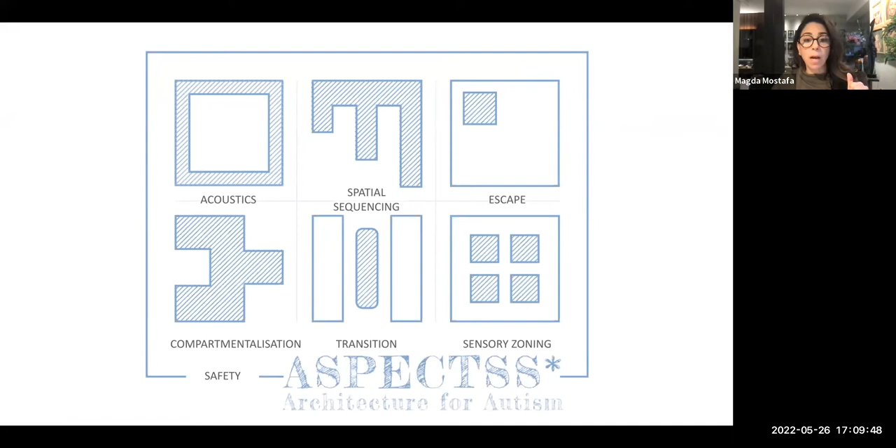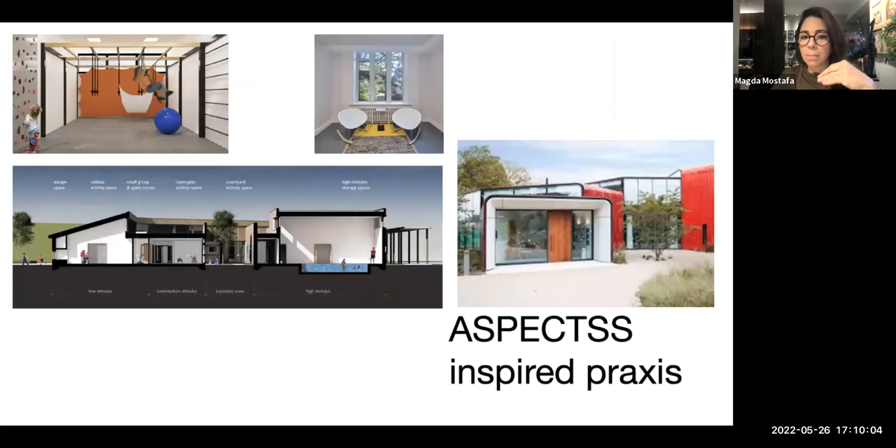Professor Frawley kindly outlined in my introduction the Autism ASPECTSS Design Index and presented its history. It is a framework for how we think about space to take this perspective into consideration. It's now being used in many places all over the world, informing a lot of scholarship, practice, and building design of my own and of partners I've partnered with in many projects all over the world.

This is actually a snapshot from the Dublin City University project, and we've had the kind opportunity to share it and its philosophy in a lot of different educational and professional venues, at the United Nations and other places like the National Autistic Society, and in the United States with different foundations. We've had the opportunity to discuss what it means to think about autism-friendly design from a lot of different perspectives, and we're continually evolving how we approach it.

One of the tools we've created was a recent audit, and we are also looking at how these guidelines—these 7 frameworks and principles—are starting to align with other design guidelines, like, for example, DeafSpace or other research, and looking at just where that fits in the literature.

Just to explain what we mean by the autism ASPECTSS framework very briefly, there are 2 versions of the ASPECTSS framework. The first version, the 1.0, was first published in 2014, and it's comprised of 7 principles. The first of those principles is acoustics.

These frameworking criteria are not prescriptive. They won't say you need to design to a certain acoustical decibel range, or use this kind of acoustical paneling or soundproofing, but they do point attention to the gradient of ways you need to work along the acoustical environment and how that can be in support of autistic users and autistic needs within your spaces.

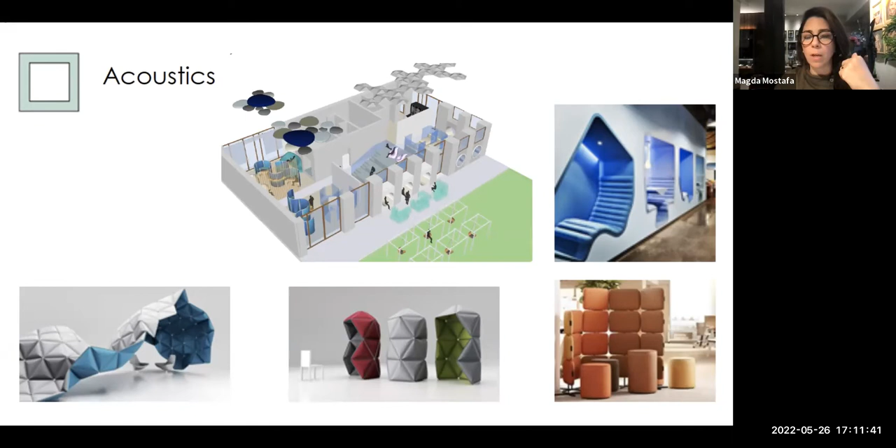And I can talk a little bit more about that maybe in the questions.

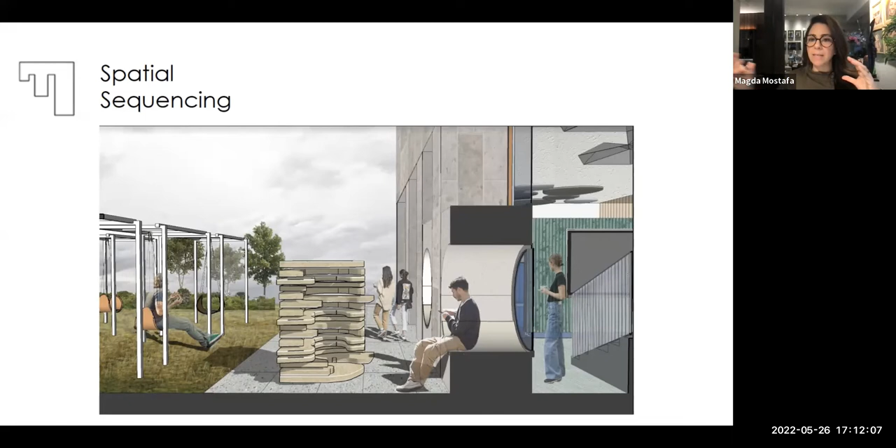The next principle is spatial sequencing, and that builds on the affinity of the autistic mind to routine, order, and predictability. It calls for all of us as designers to look at space as an experience of a sequence of spaces, and design in a way that's more seamless and predictable, to hopefully reduce the stressors and anxieties of being in space that are so common for people on the spectrum.

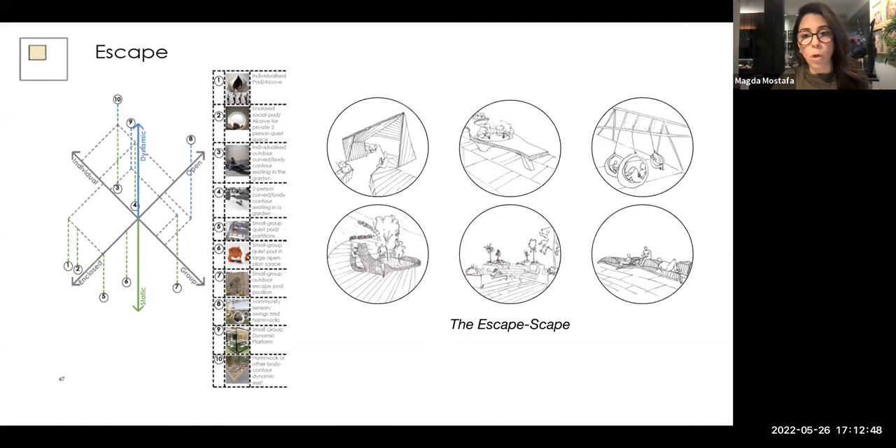The third principle is escape, and it's about creating an infrastructure of places and spaces that autistic individuals, and any individual, can really retreat to in moments of sensory overload. This is really important in places like educational spaces, campuses, cities, and transportation infrastructure. I was just in a lecture earlier today about healthcare environments that I'll talk about in a moment. But escape spaces, the escape-scape or escape network and landscape, can be incredibly powerful in giving access to individuals on the spectrum to space.

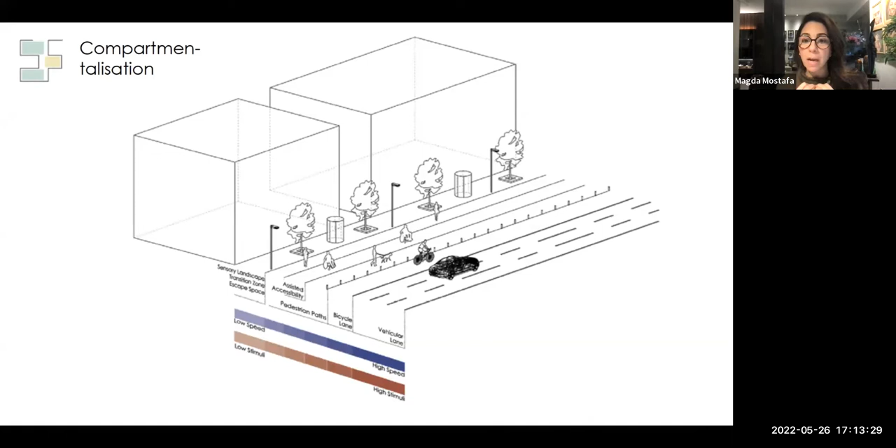The next criteria is compartmentalization, and it's really about organizing our spatial experiences into manageable pieces. One of the biggest challenges, if you think of autism from the sensory perception model, one of the models we can use to define and understand the autistic experience, is that a lot of our challenge in the built environment is unnecessary sensory input. We are constantly expecting people to engage with sensory information that is unnecessary for their task, and that can be overwhelming. I think it almost borders on a level of abuse and disrespect, because we're putting sensory overload into our environments, particularly in critical spaces like school or hospital environments, where functionality is so key to your success. When you put too much unnecessary sensory input into a space, you're disabling the autistic mind that is trying to operate within it.

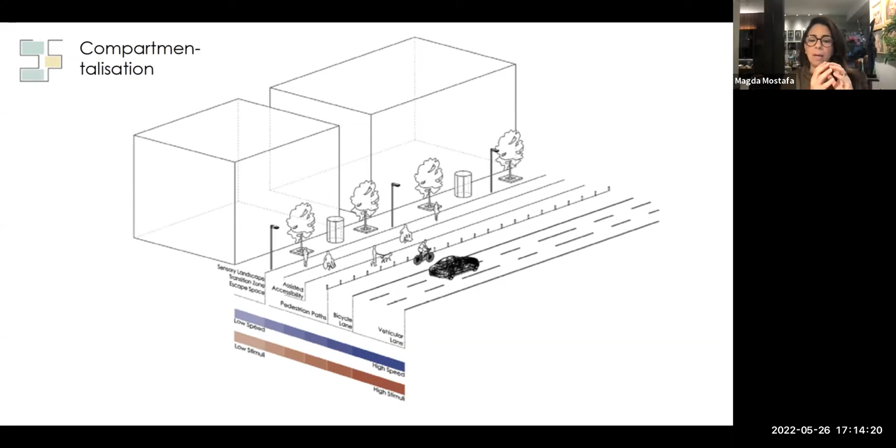So compartmentalization is about only allowing the sensory input that is necessary for the task. It can be applied — I have a diagram here that looks at the city environment — but it can also be applied to classrooms, residential spaces, and it's about cutting space up and reducing the sensory environment to only what is absolutely necessary. And of course, like all of these principles, there are different gradients and different ways to implement it that I can talk about later.

The fifth concept is transition. Transition is key because we expect individuals to seamlessly move from one experience to the next with no opportunity for adjustment, and that can be a huge challenge from the autistic perspective. So creating transition spaces allows, respects, and validates the need to adjust your sensory makeup — to modulate and regulate your sensory experience to prepare yourself for the next task.

Some examples: you're at university, you take the bus on a crowded street, you arrive to campus, and within the first 10 minutes you have to find your class, get in your seat, and immediately focus on a very complex series of information in a social environment you're not particularly comfortable with, in a hall that may be echoey and noisy. You're expected to make that transition immediately, and when you don't, people say you're a slow learner.

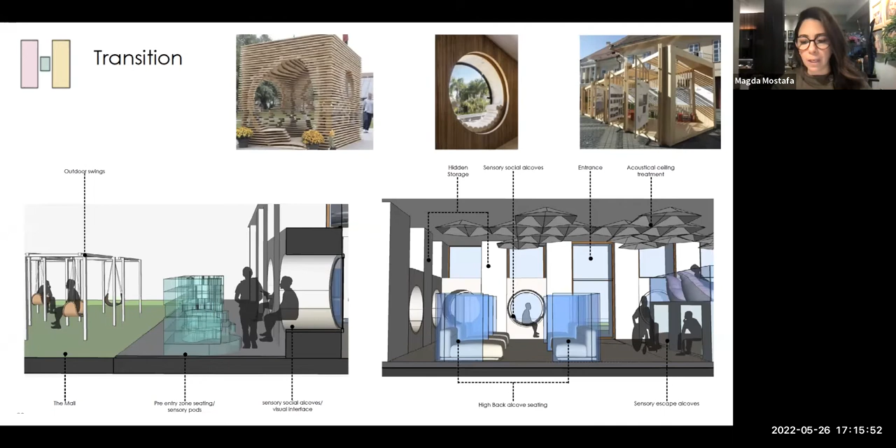But if you give that transition opportunity — a space that is secluded, secured, quiet, and safe for an individual to take a few moments to regulate and adjust — that prepares them and sets them up better for success. You take someone who is slow to learn and possibly give them the opportunity to get on task and focus, because you've cleared out that sensory noise from their world.

Thinking about our environment and sensory pieces — I know there may be administrators or decision makers among our participants who think about how they organize their buildings or manage their spaces. Typically we think of functionality: we put offices next to offices, classrooms next to classrooms, patient rooms next to patient rooms, nurses' stations next to nurses' stations, and so on. So we think purely from the lens of utility. But when you're designing for the autistic experience, you also need to overlay that with the lens of the sensory environment.

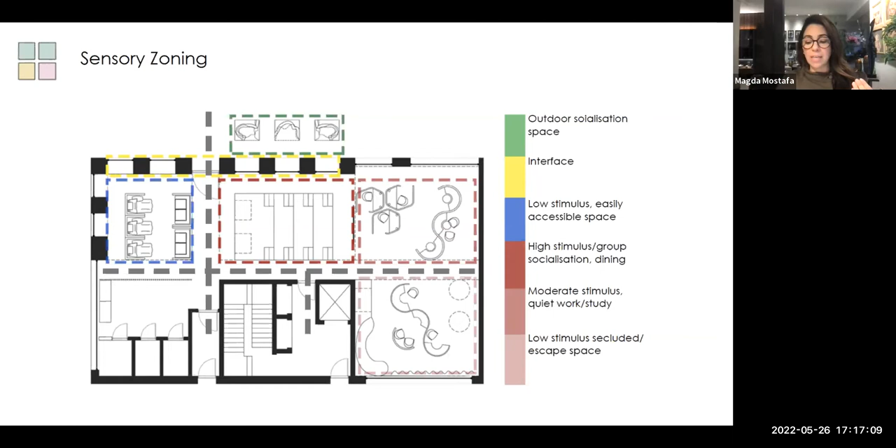Just this morning, I'm redesigning a new autism center, and we're looking at vocational training spaces that have heavy equipment that could be noisy, loud, and vibrating. Then we have occupational therapy spaces that are about mock apartments and life skills. So one is very noisy and busy and about physical movement, and one is quieter and more focused. Although as a program they're all seen as life skills or vocational training or adult support, from the sensory perspective they are very, very different qualities of space. You need to design with that understanding so everything is seamless. And of course safety is always an issue we need to think about when designing, not only for the autistic perspective, but for everyone.

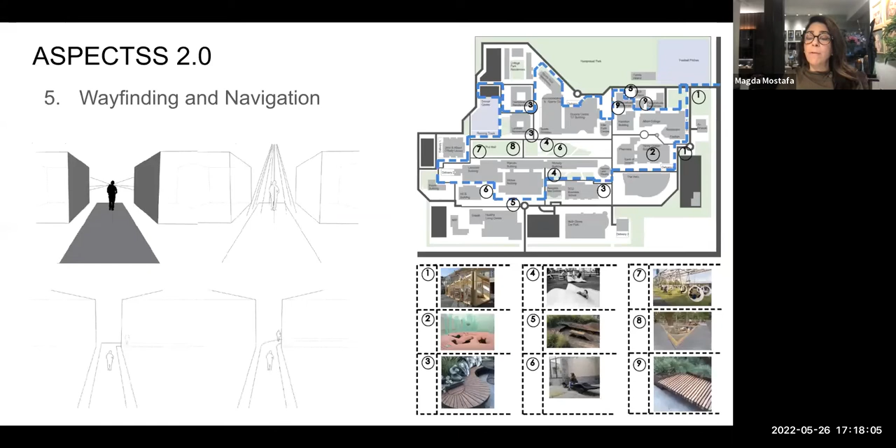With the DCU Dublin City University project, we had the opportunity with their amazing students and autism-friendly university team, and different groups like As I Am, Ireland's incredible autism advocacy group led by the brilliant Adam Harris, and other groups that joined us to bring their autistic perspective to designing this autism-friendly university. We had the opportunity to do a second version of ASPECTSS that we're calling ASPECTSS 2.0. In it we outlined different color schemes found to be successful, different lighting strategies, materials, furniture layouts, setups and typologies that were useful, different strategies for wayfinding and navigation around campus or in certain spaces. And with Smart DCU's team, we built out thinking around how technology and smart systems can be used to support autistic users.

That's something I can touch on more in our discussion, along with issues of sensory economics and programming. I want to get into some examples, because looking at autism and ASPECTSS from an abstract view is one thing, but seeing how it can be brought to a space and a place to redesign it is another.

So this is an image of some work on a residential college in an Ivy League university in the United States that I am consulting on with a group of brilliant colleagues at MIXdesign, where I'm a member of their design consultancy and think tank.

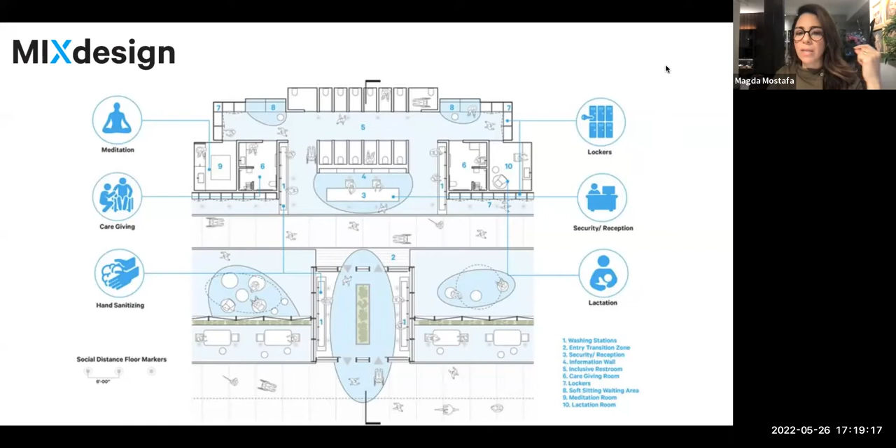This proposal is what we call multisensory wayfinding. It takes a prototype that's available in every building type: hallways and corridors. If you can understand how to design those spaces to accommodate the needs not only of the autistic, but the visually impaired, the hearing impaired, the mobility impaired, different age groups, and different gender identities that will be part of this college campus, then you can truly be inclusive in a way that's not only about installing a wheelchair ramp or doing Braille signage.

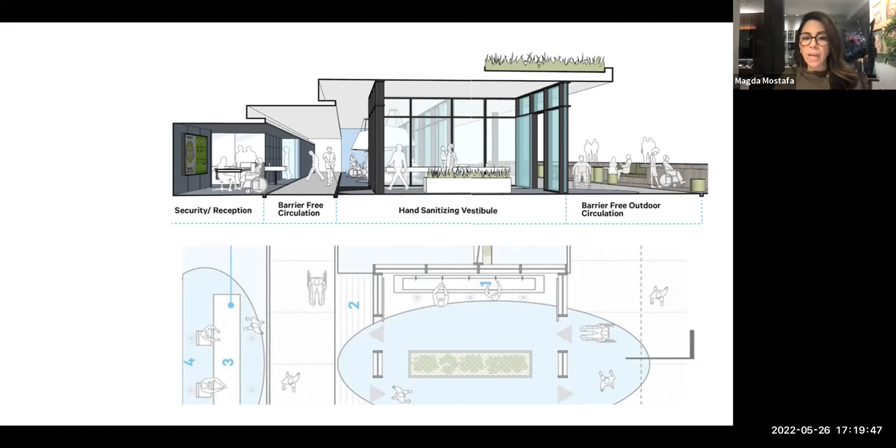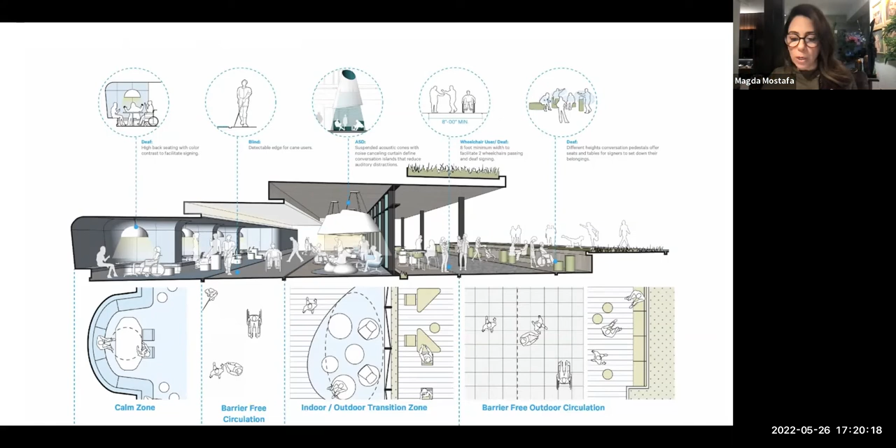This multisensory wayfinding strategy does exactly that. It takes the different needs of the deaf, the blind, the autistic, the wheelchair user, and so on, and creates microclimates that prioritize one of those needs at a time. For example, the one in the center, this cone structure, creates an acoustical little island in the middle for autistic users, but is also really helpful for people hard of hearing who need to filter out background noise, or for individuals focused on work or with attention deficits who need that acoustical support. Case in point, we have an ambulance driving by as an example of acoustical noise, and how useful it will be to filter some of that out.

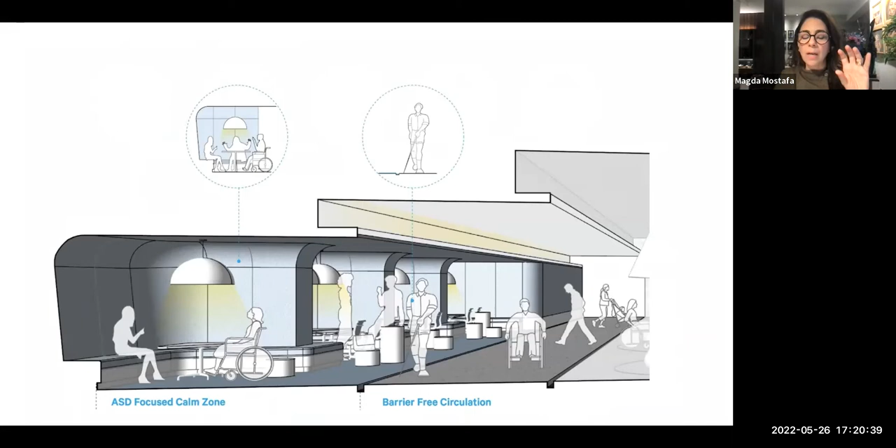There are other examples too. A focused calm zone, similar to the escape spaces I showed earlier, can be used not only for autistic users but as a quiet space for deaf signers to retreat to and have a conversation, since their conversation is about facing one another and they can't necessarily do it while in motion in the circulation space. So it's about thinking intersectionally—how strategies developed for autism can benefit others and vice versa.

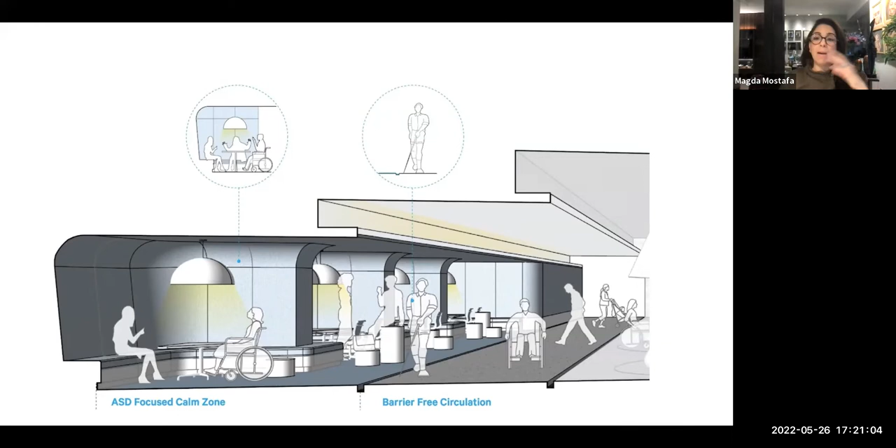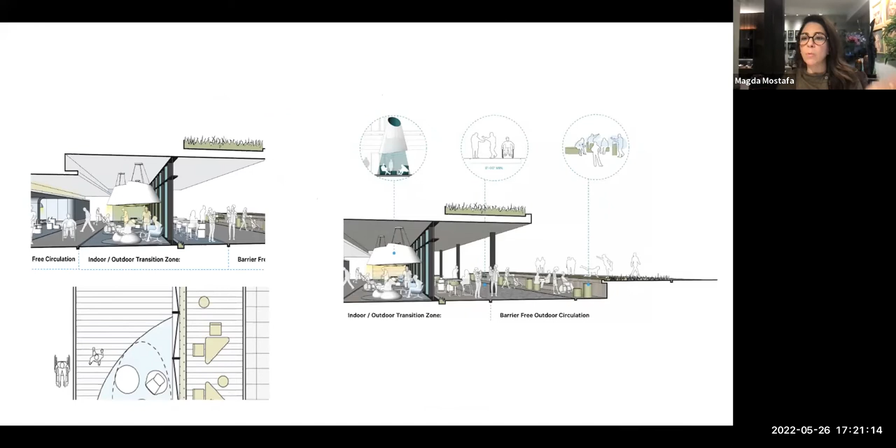One of the partners I work with on this project at Mixed Design is Hansel Bauman, who's the author of the Deaf Space Guidelines, which is the counterpart of ASPECTSS in the Deaf World. It may be interesting for some of you to look at.

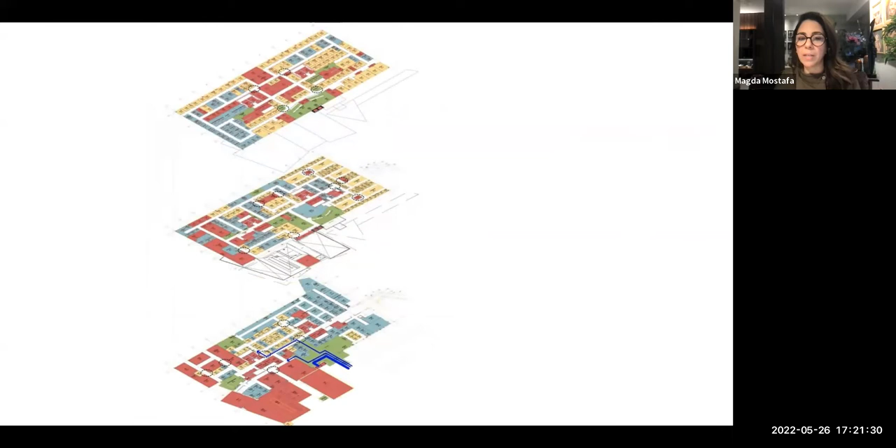I also want to go very quickly through a hospital project, a healthcare project, just because I know Professor Frawley himself and maybe others on the call may be interested in the healthcare space. So this is the University of Nebraska's Medical Center Monroe-Meyer Institute that I designed with Altus Studios.

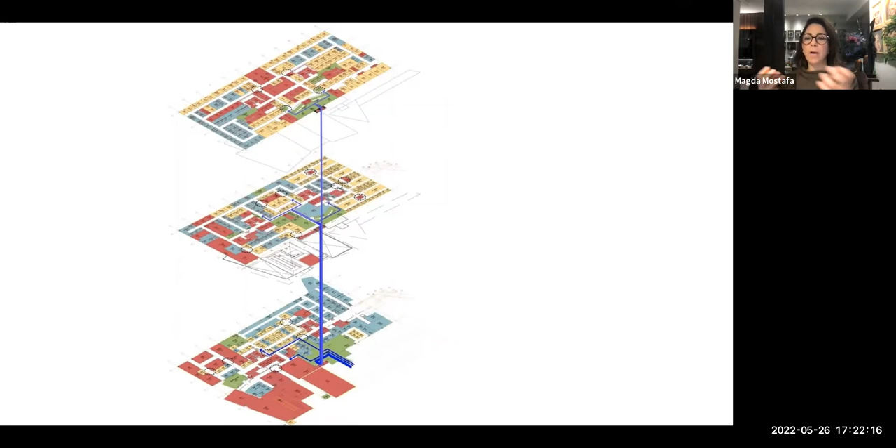Looking at this diagram, one of my responsibilities was to look at the hospital environment in its entirety. Embedded within it was an early intervention autism center, and that's why I was brought on to consult, but I gradually spilled over my input to all the spaces of the hospital environment, because there could be graduate students who are on the spectrum, physicians who are on the spectrum, or patients. If you're autistic, it doesn't mean you're not going to break your leg or need your appendix out or need your tooth fixed. So the idea of the autistic profile, we were able to have conversations where we see it as something that carried over the entire population of any space.

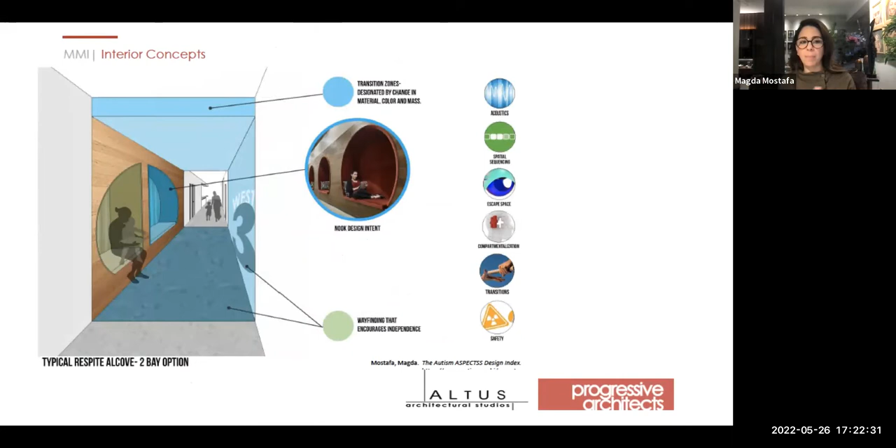Altus is really a world leader in hospital design and did a fantastic job in thinking about coordinating ASPECTSS into the work that they presented—again, the wayfinding strategy, the escape spaces along the corridors, transition spaces, use of signage, and so on.

Another project that I was lucky enough to be invited to and involved in was by Ab Rogers, the brilliant British architect and designer who has designed some of the most beautiful healthcare spaces, in particular one of the Maggie Centers—I think it was the Marsden Maggie Center that he designed. He recently invited me to give my neurodiversity and autism perspective to designing the hospital of the future, as part of the UK's policy exchange Wolfson initiative for what the hospital of the future should look like.

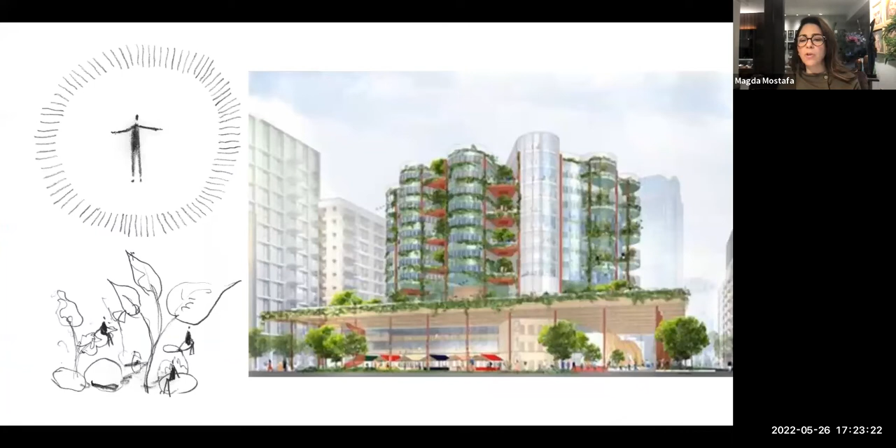Ab's brilliant strategy that you see in its final version here was all about human-centered design, bringing nature into the hospital, but also viewed through the lens of autism and neurodiversity and many other lenses. This document is available in its entirety online if anyone wants to read it. It's open access, and it shows all sorts of lenses of what the hospital should look like.

We talked about different processes and the power of thinking about design. One of the things that we were very engaged in was how do we develop a participatory process that takes the needs of autistic individuals into consideration, how we can run workshops. Participatory design has become something very common in school design, hospital design, all sorts of different strategies, but the tool itself is not necessarily set up for the autistic experience.

So we rethought that process, and as part of the Dublin City University guideline, there's a whole set on how you can think about these processes differently.

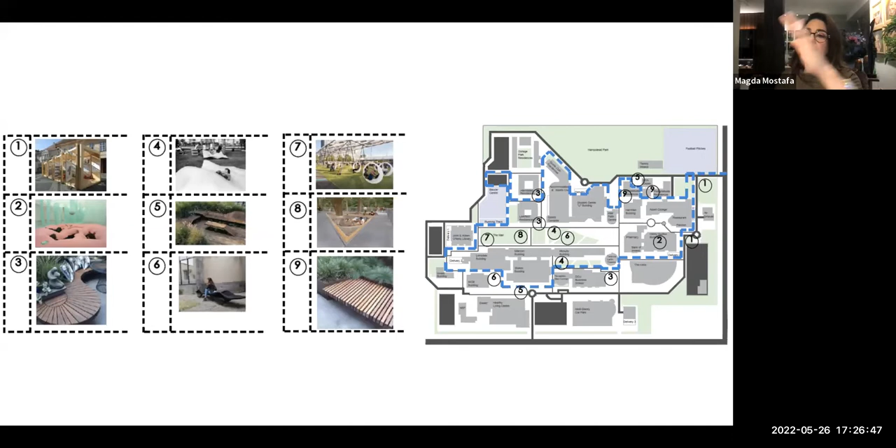The reason she was doing it is that the mall was very overcrowded, noisy, smelly, and overstimulating. So she had crafted this alternative pathway for herself. We thought that to be such a brilliant strategy that we formalized it and proposed creating an entire full circuit of campus as an alternative pathway other individuals can use, dotted along which is a group of escape spaces and sensory retreats people can engage in.

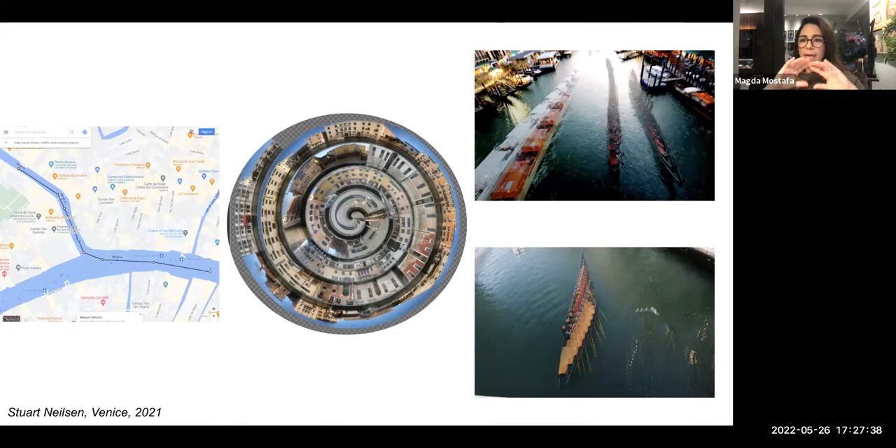This final set of slides, before I close and give an opportunity for questions, is by the brilliant autistic artist and researcher, who is himself Irish, Stuart Neilsen. Stuart's work was also represented as part of the collection in the Venice Biennale. Through his brilliant use of photography and computer programming to analyze the moving image, he's able to recreate experiences in the built environment, breaking them down in a distilled, compact way that helps him filter out all that busyness.

I hope I haven't used up too much time. I think I went a little bit over, I apologize. But thank you very much.

No, not at all. That was such an incredibly interesting presentation. In fact, I think it's one of the best presentations I've seen in architecture, and I've actually seen a number over the last 4 to 5 years.

So many areas are popping out for me. I'm glad you mentioned hospitals, because I know we're here to talk about autism and architecture, but I really am keen to see our acute mental health units become spaces which are genuinely therapeutic, where the milieu is healing. And of course this relates to autistic people and people who aren't autistic, it's that universal design that we need to look at.